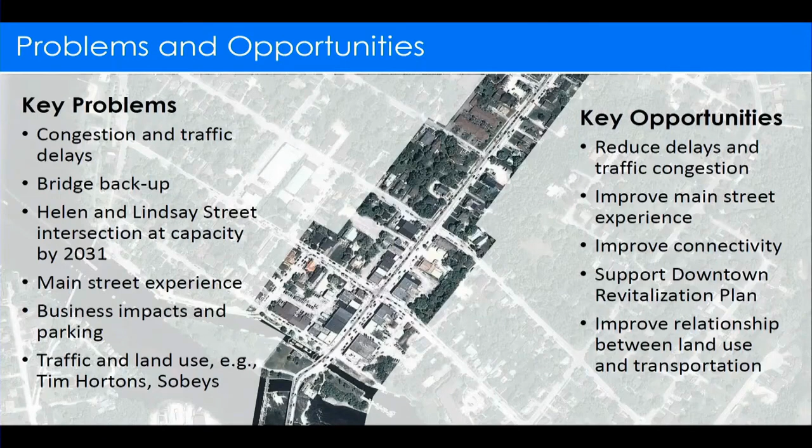You can support downtown revitalization, which is currently going through a revitalization plan that is now being implemented. And ultimately, we can try to address some of the relationship challenges between the land use that's in play right now and the transportation network that exists.

Next slide, please. So the core issues relate to two elements: it's traffic volume, but it's also traffic flow.

So sometimes I think people think that it's just growth and lots of cars and therefore that's why it's congestion, but it's a combination also of the configuration and the design of intersections and streets and that network and how it connects. So together, those things are what we're trying to address in our alternatives.

The third thing that's a component of these challenges is the route alternatives. So as you all know, given the geography and the topography here, there's not many alternatives. You need to cross this bridge in this specific region in order to get around the area.

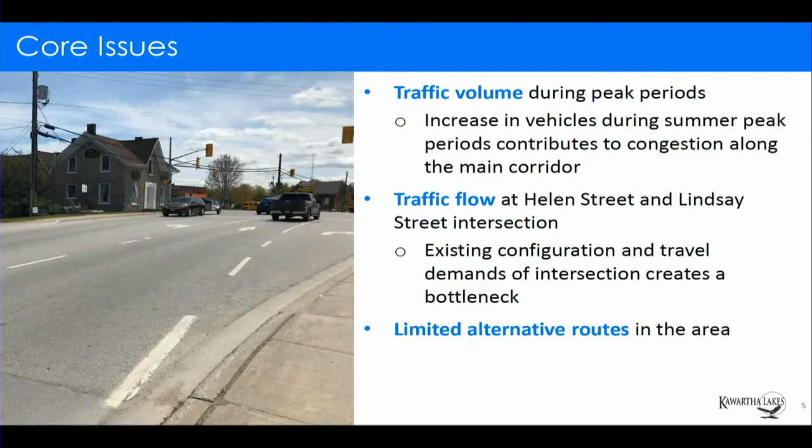North and south of the waterways. And so this becomes one of the key elements that we want to explore in the options for a solution. Next slide, please.

The intersection issues that I was speaking to in terms of the challenges or the problems, this image points these out. This is really at the south end of the bridge. You've got a downtown corridor that's generally at capacity for that intersection of Helen and Lindsay.

And this relates specifically to the southbound traffic in particular that's trying to get through the intersection, while you also have queuing to turn left into the Sobeys and the Tim Hortons site that's on the east side of Lindsay Street.

In addition, there's a number of left turns being made from Helen, trying to turn north onto the bridge. And then from Lindsay Street, the northbound traffic that's actually turning left to head west on Helen Street. So there's a lot of turning movements that are happening here, and the queues get extensive and conflicts arise.

Even whether or not people are following the rules is also a layer on top of that we have to recognize, when people are jumping lights.

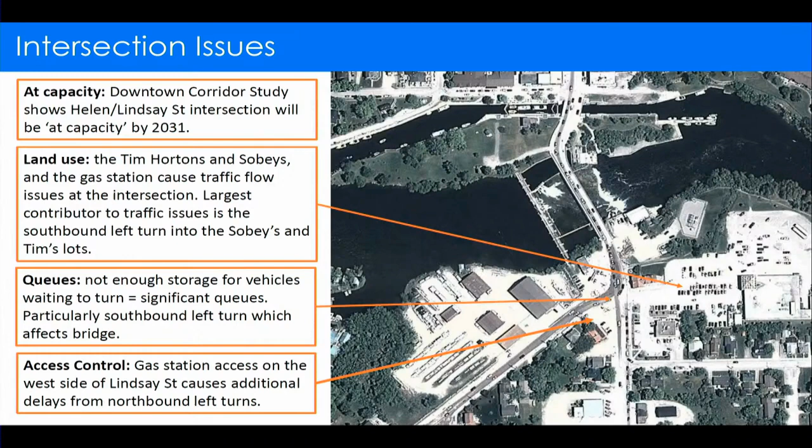And then finally, there is an access control issue. It's quite a bit smaller than some of the other challenges, but that is just because of the single design of a curb on the northwest corner, there's a gas station there, which means that people kind of turn into that site wherever they can and want to, and so it's less controlled, and that low curb causes a few challenges too, although not necessarily as significant.

Next slide, please. So for us to address these issues, we had to undertake a number of studies. This is just a list to give you an idea of the work that we've done: transportation studies, environmental reviews, socioeconomic studies, cultural heritage and archaeology, and technical studies related to road design and bridge design, topography, property, utilities, those kinds of things.

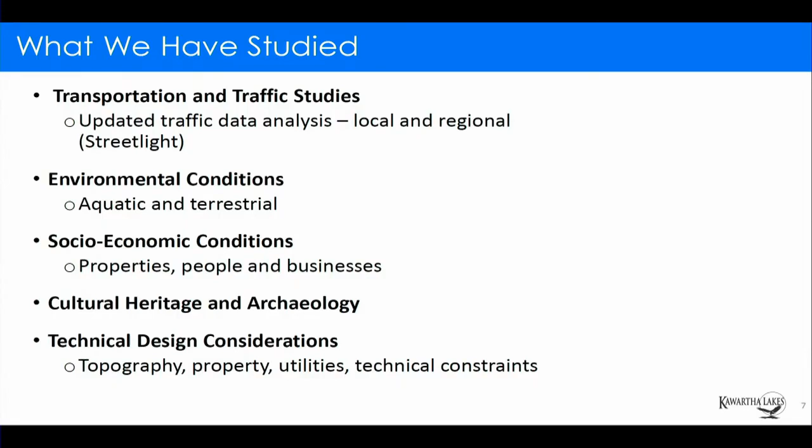Next slide, please. So the options list that we came up with and we took out for public consultation was a do nothing option, which you always include in an EA study. So we have that on that list.

And improve local traffic operations. So this is a smaller scale type of intervention working within the network that exists.

Expanding the existing bridge. So can we look at solutions that actually address the existing bridge that's there and help manage the traffic challenges by doing that?

Building a second in-town crossing. So looking within town, is there another location where a potential second bridge could go? And then the connections that actually are required for a second bridge.

And then a bypass. Is there a bypass around town, and what would the value of that be, and how effective would that be, and where would it be? Next slide, please.

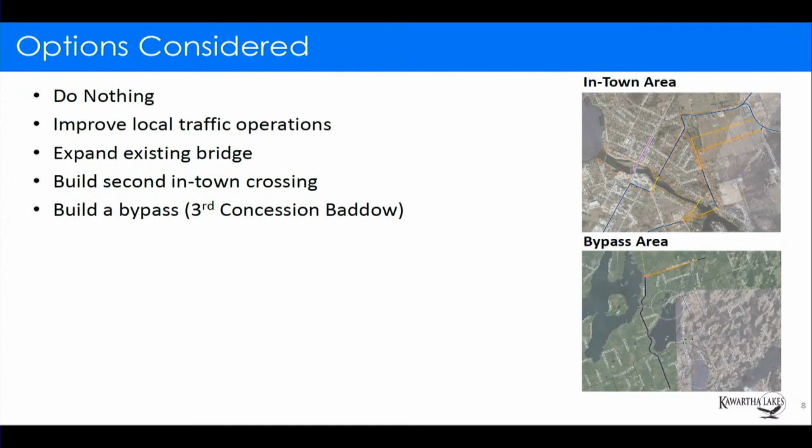I'll start with our traffic study because it's important to set the grounding for the recommendations being made. There's quite a lot of work done around existing traffic issues. We did two things: one, we set up video cameras to look at live traffic in the area at the end of May last year, over a period of 4 days.

We also did an examination based on data collection using streetlight data, which tracks GPS systems on phones and in cars, and looks at the origin and destination of traffic crossing the bridge. It's a great tool to hone in on where that traffic is coming from, where it's going, and to extrapolate key analysis to understand what solutions would serve the traffic actually using the bridge.

What we found is that most vehicle trips using the bridge originate in a relatively local area. This was surprising at first, since there's a perception that people are coming from outside, or it's just 905 drivers or cottagers passing through without staying local. What we found is there's a large proportion of local traffic, which isn't surprising since there aren't many alternatives — people can't go far without hopping in their car in this geography.

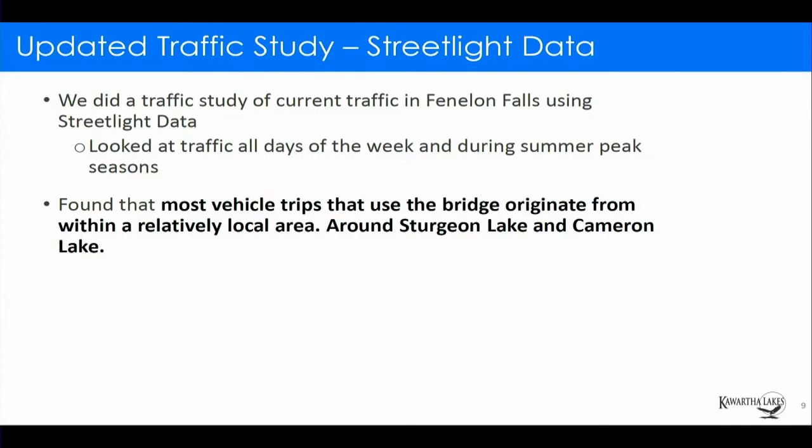Next slide, please. Here's a map of the different zones we looked at within the collected data. The data was gathered for the whole summer, June to September, and we looked at midweek periods, weekend peak periods, commercial vehicles, and autos. This let us really break down and inform the decisions we're recommending today. The purple is the boundary of the city of Kawartha Lakes, and the star is the bridge.

That's the location we're talking about. Ultimately, the majority of trips — over 70% — are coming from within the city of Kawartha Lakes. Up to 20% of trips are between Kawartha Lakes and external areas. That's still a reasonable number, and we want to make sure it's understood — we're not saying there's no external movement to and from, we just want to understand it in context of the other numbers.

Between 35 and 39% of trips travel north to south or south to north — a specific movement using the bridge to cross and travel through this area. Then 47 to 51% of trips are between areas south of the bridge, meaning the zones that abut Sturgeon Lake. Next slide, please.

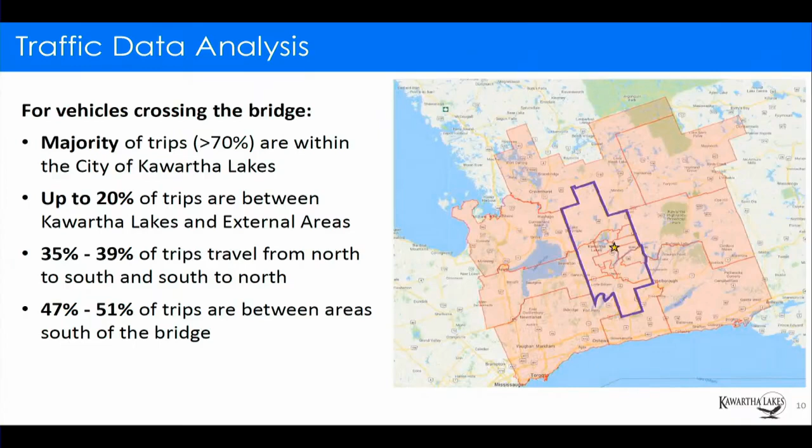I want to point out that if there are questions about the data we collected and our findings, I have additional supplementary materials available to show during discussion. So ultimately, what does this tell us? It tells us that given there's a lot of local traffic, we need to address some of the traffic operation issues in town. If this is locally generated with local destinations, we should be looking at that — we want to make sure that's on the table.

Number two, there's some support for both in-town movement with traffic diversion — approximately 20 to 30% of traffic could be diverted around town. As I noted, 20% of the traffic is traveling north-south through the city of Kawartha Lakes, which means there's actually an opportunity for 20 to 30% of that traffic to be diverted.

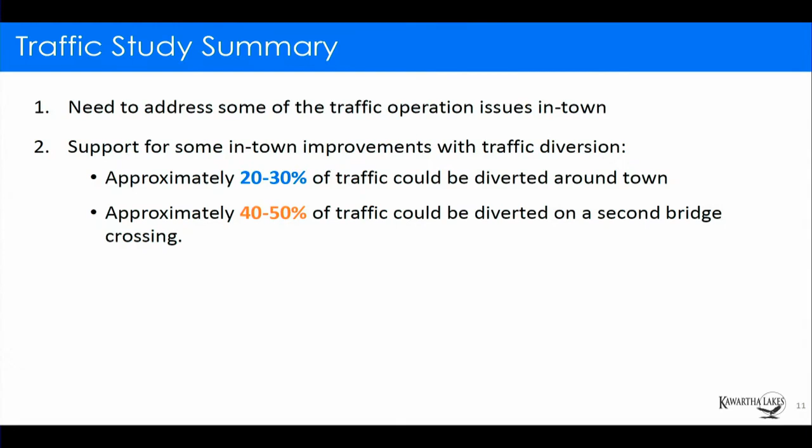If you wanted to do a second bridge, you'd have 40 to 50% of the traffic that could be diverted onto a parallel second bridge in town. So there's our context.

In terms of options, next slide please. The traffic operation improvements - I'm going to start at the small scale, the local side.

At the local level within the existing network, the traffic operation improvements we looked at were very extensive. Ian can speak more to this if there's questions. We looked at more than 25 different options, and they fell into categories of signal changes, access control - the left turning that happens and the right turns into sites, that's the land use relationship. Additional capacity - storage lanes for all the queuing that happens when people are trying to turn and don't make it through the light and the queue extends further back. Restricting movements, and the potential to explore or relocate some land uses. We didn't get too far into that; it's more wanting to acknowledge that land use is inherent with the relationship of transportation, and to consider that.

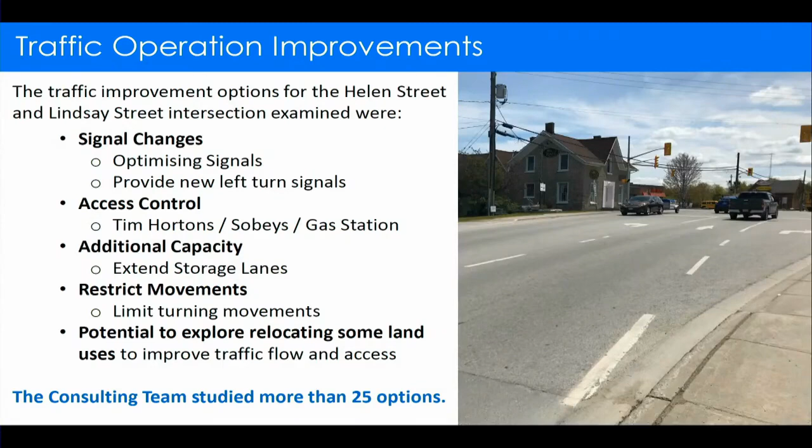Next slide please. Okay, so the next few slides, it's a little challenging to describe because I can't point this out to you using a pointer or anything, so I'm going to try to say this as best I can. The next few slides talk about ultimately the recommended in-town traffic improvement option we have. In our public consultation, we showed a few more than what you're going to see now, but this is the one we landed on for recommendation.

Ultimately, all of the arrows you're seeing on the right-hand side, current condition, are all green - you can do all of these movements. You can drive straight through from Helen Street into the Sobeys and Tim Hortons site. If you're on the bridge and want to turn left into the Sobeys and Tim Hortons site, you can queue in the left turn lane and do that. If you are in the Sobeys and Tim Hortons site and want to exit and go straight through the intersection onto Helen Street, or take a left and head south on Lindsay, you can do all of that. In addition, you can turn right from Lindsay Street into the Tim Hortons and out of it, and you can turn right to exit the Tim Hortons and Sobeys site.

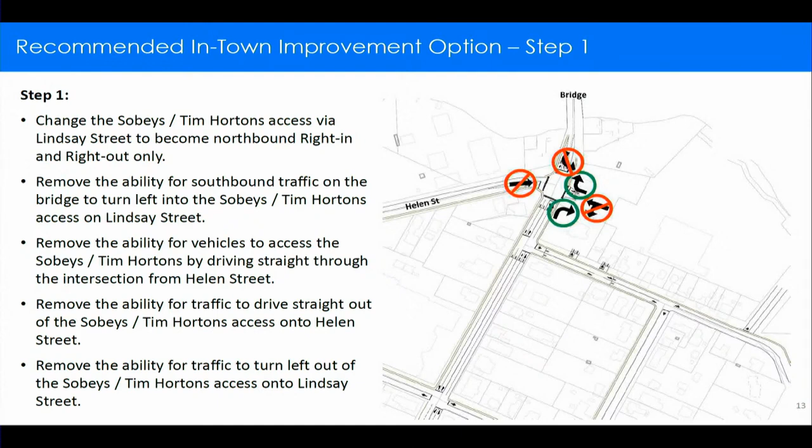What we are suggesting is that of all of those permitted movements today, we start limiting those movements. Ultimately, we start to reduce the amount of traffic that's specifically using this intersection only to both access the Sobeys, the Tim Hortons, the bridge, heading north-south cross through the town, get access to Colborne Street, etc. So the bullets here describe those changes in turning movements. If you go to the next slide, you'll see in the subsequent slides what then results.

First, if we eliminate the left turn from the bridge - so if you're headed southbound and cross over the bridge, and we take off the left turn to be able to turn into Sobeys Tim Hortons - what does that mean? How do you get to the Sobeys and Tim Hortons? You go down to Elliot Street, and there would be a new intersection, a new light added at Elliot Street, and the left turn would be permitted there. You can see in blue the movement from the bridge southbound to go into the Sobeys around the back of the building. There is already an access to the Tim Hortons on Elliot Street, so that's how you would get into the Tim Hortons from there, from that earlier access point that's closer to Lindsay Street.

In addition, for people from Helen Street, instead of being able to drive straight through into the Sobeys and Tim Hortons, they would have to take a right at Lindsay and then a left onto Elliot. Ultimately, this would move the traffic around a bit and relieve that pressure for those turning movements, and allow a little bit more green time for through traffic. So you can get more traffic through town, and that's actually one of the key outcomes of this solution.

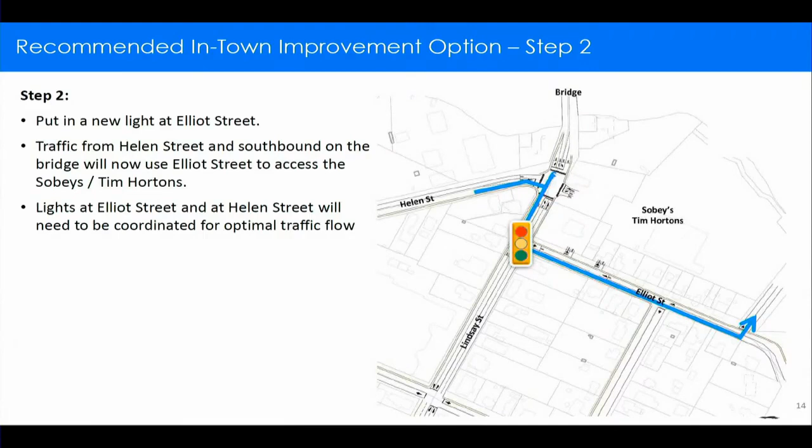Next slide please. Step 3 is to exit.

So what we're recommending is that you can exit the Sobeys and Tim Hortons site. It is a right in, right out. But if you wanted to go south, or if you wanted to go west, you would use Elliot Street.

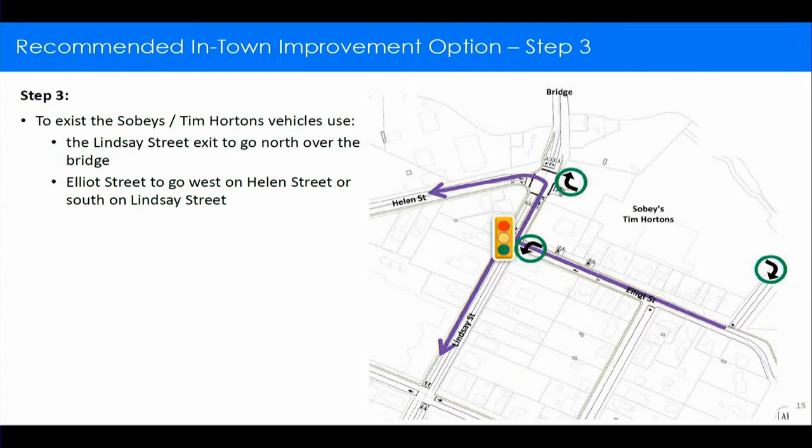So again, if you were at the Tim Hortons, you could use the existing Elliot Street entrance and exit. But for Sobeys, you would go around the back, and that road is currently only a service access to the Sobeys and Tim Hortons. It's right of way. The width of the property is wide enough. It would require repaving, but other than that, it could accommodate the movements we are suggesting.

So combining all of this is what it looks like all together. At the intersection of Helen and Lindsay, there will now be two southbound through lanes, which you don't have currently, and that will get vehicles through the intersection with less green time than you actually require, and allows for more green time to be given to the other movements at that intersection. The southbound left turns are better accommodated at Elliot Street, and there's fewer conflicts. So when we're modeling this with the traffic modeling, we're able to see that the conflict is reduced, and they're able to get more vehicles through.

It is really important that we talk about Elliot Street itself. This has implications for Elliot Street, and we want to acknowledge that and make sure that there's some discussion on that. I will get to that in the next slide.

There's also potential - so this is the solution that we can put forward as part of this work within the public space right of way that's available. Additional improvements could be made by working with the Sobeys and then Tim Hortons. There's potential opportunity to acquire other sites on that property to allow for them to reorganize entrances and exits and circulation on their property. So there's some on-site improvements that could be made. Obviously, we can't make those recommendations for them, but it is something that they're aware of and that could be further explored.

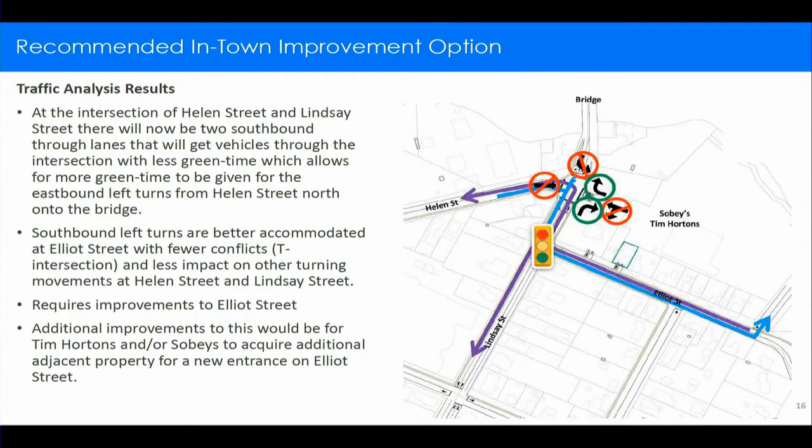So Elliot Street, as I said, getting to the key point of Elliot. There have been a number of questions from the community about this, and I want to be clear that Elliot Street has already been planned for reconstruction. So there are current issues, and people have brought those forward to me as well. The condition of Elliot is not great, but most importantly is the Tim Hortons traffic.

This is outside of necessarily the peak traffic issues that are being faced even within our EA study. This is a case of Tim Hortons, in the sense that it's not just here - this happens all over the place with very popular drive-through destinations. And so to address that, the city has been looking at, through another separate work, upgrades to Elliot Street to deal with the condition of Elliot itself, as well as potentially address some of the Tim Hortons access issues.

Ultimately, what we're recommending is that you actually go a bit further than what's currently in the reconstruction plan for Elliot, and we revisit it because, as you can see here, within the property limits, so without needing to take property from anyone, you can add a left turn lane as a center lane on Elliot Street. What we're showing here is just an example of that. This is just really preliminary. It wasn't part of our work to really draw up Elliot Street in itself, but that should be the next step if this was pushed forward.

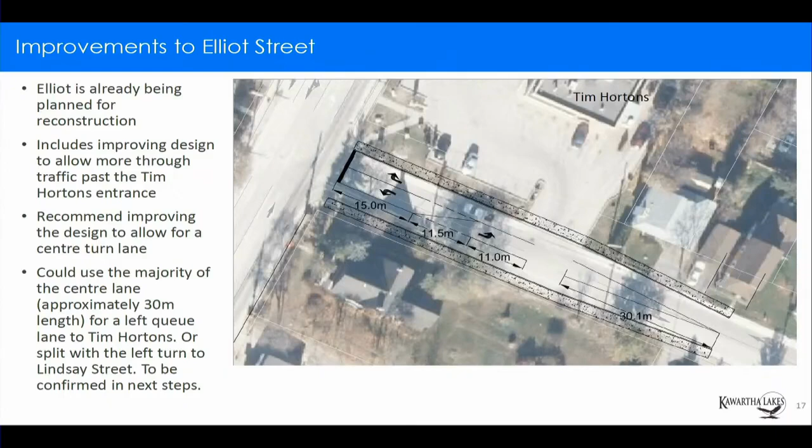This is something we recommend go forward regardless, because of the issues happening here with those movements. So that sums up what I've got for the traffic improvements in town. That's our recommendation, part one, for the work we've done.

In addition to this, the work on traffic improvements doesn't require an EA. It can all be done within the Schedule A, Schedule A+ categories of an environmental assessment. The next items all require larger EAs, and that's what I'm going to go through here, what we've assessed and where we've landed.

One of them, as I said earlier, is bridge widening. I'll get right to it: we don't recommend that bridge widening be considered as a solution to traffic. We acknowledge that bridge rehab is required, and it's something that's on the books for Fenelon Falls, and that's an important thing.

Within that, we also heard quite a lot from the community, and we agree that improving the pedestrian crossing that's part of the bridge is important, and that can happen. One of the key things is to move it to the east side of the bridge instead of its current location, and to make it better. Currently it floods and it's not wide enough for two mobility devices to pass each other, etc. Those kinds of things we do agree with, and they should happen.

But expanding the bridge, either to accommodate a larger queuing lane for southbound traffic to turn left into the Sobeys Tim Hortons, or to expand it so you could have two through lanes that would merge together - what we're seeing in our traffic results is that we're not getting the benefit, because the movements of turning at Helen and Lindsay, even if you increase the queue length or space for vehicles to queue along the bridge, they would continue to queue, and eventually your queue would merge with the through lane. That continuation of queuing is because you just can't get enough vehicles through this intersection, turning left through it with all the other competing demands happening. So ultimately, the bridge expansion for traffic improvement is not what we recommend.

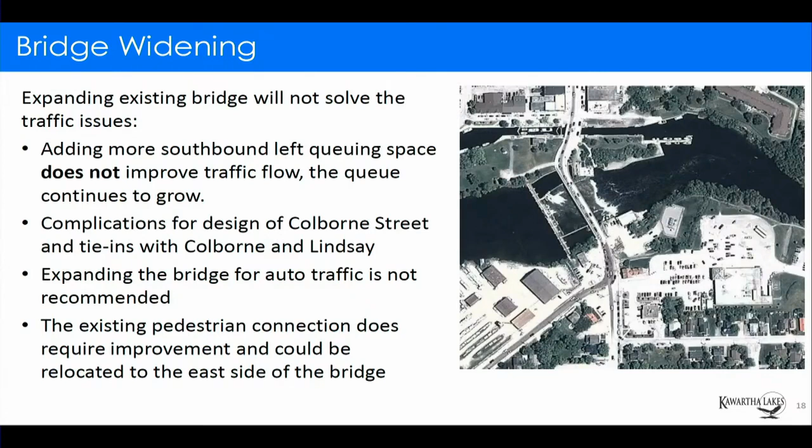The second bridge solution is the in-town bridge crossing. There's been a lot of discussion about this, and I still have a number of conversations on a regular, weekly basis with residents about opportunities for a second in-town crossing. As part of our study and the recommendations here, ultimately, a second in-town crossing has a lot of big wins in terms of traffic.

The scale of the solution, in our professional opinion, does not match the scale of the need at this point. Ultimately, we're looking at 2031 traffic, and we don't see a need to have double the capacity in the local network here for the amount of impacts incurred through a solution of this scale - a second bridge in town. That also includes the cost of a solution of this scale.

So the topography is extremely complicated here. It likely requires a 3 to 4 span bridge. We have roads, on the south side of the waterway, that are existing residential quiet communities with schools and long-term care facilities, that would have to connect over and across to new roads on properties that don't exist - some of which have cultural heritage and natural heritage features we need to be cognizant of. It doesn't mean you can't do it. It just means the challenges are big, the costs will be big, and the impacts to property are big. So at this time, we don't see the scale of the need matching a scale of solution this big.

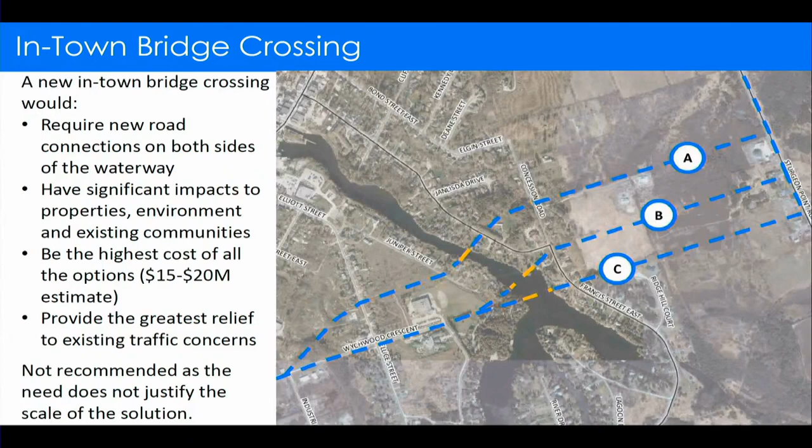It does not mean that wouldn't be possible in the future, and I'll get to recommendations in a couple slides that I want to speak to on that.

So the next one is the bypass. As I said in the traffic study, we found that up to 20% of traffic was going through, which means that is the potential traffic to redirect onto a bypass. In addition, it's also truck traffic.

We see this bypass as also a potential haul route, and that was actually previously identified by the city as a haul route or truck goods movement potential corridor or connection. This bypass would have fewer impacts to property. We'd be using the existing Highway 35 connection up to 3rd Concession, and then across 3rd Concession and a bridge over the Burnt River, continuing on 3rd Concession to connect again with County Road 121.

It may seem like a big detour, but time-wise it's actually quite similar and comparable, because the slowdown that happens through town—even in this graphic you can see the length of these routes is actually quite similar. When you have to slow down going through town, that outweighs the additional distance you might be taking for a bypass.

This will have some property impacts as well. There are cottages here, and it's within a floodplain, so I'll talk about that in terms of the key issues that have to be addressed. Ultimately, we think the combination of traffic improvements in town with the Helen and Lindsay intersection and a bypass is the scale of relief well suited for the current and future traffic conditions projected to 2031, as we've studied them with the information we have.

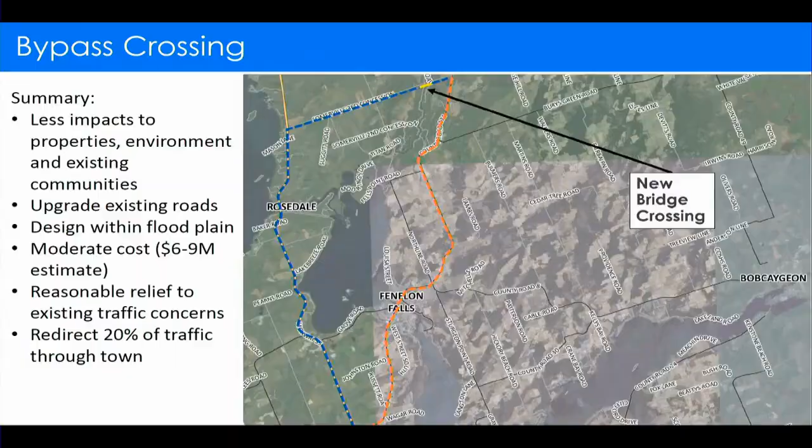So what does that mean in terms of the bypass? Unfortunately, this isn't the end of the study that's required. A bypass over the river does require a Schedule C EA. The work we have done to date has been up to and including a Phase 1 and Phase 2, which is a Schedule B EA, meaning we looked at the big picture solutions—those buckets I've just outlined. Now that we have a preliminary recommendation, if supported by council, Schedule C work would be required, which includes design to address these key issues.

So the key issues are, obviously, property impacts. You can see 8 to 10 properties here that we've highlighted as key properties. Some may not actually have the footprint of the bridge, but we recognize they would be very close to this structure, and you could have noise, spray, and things like that which would need to be addressed. It may be that you take a few more properties to provide a buffer, but that needs to be worked out in detailed design, or in the Schedule C work.

There's the natural environment conditions—this is a river, there's wildlife habitat, natural green spaces, well-established woodlots and trees in this area. Noise and air quality, I already spoke to; that also applies along Third Concession. We have to recognize that we'd be increasing traffic on Third Concession, so we need to look at the condition of the road and whether any repaving may be required, etc.

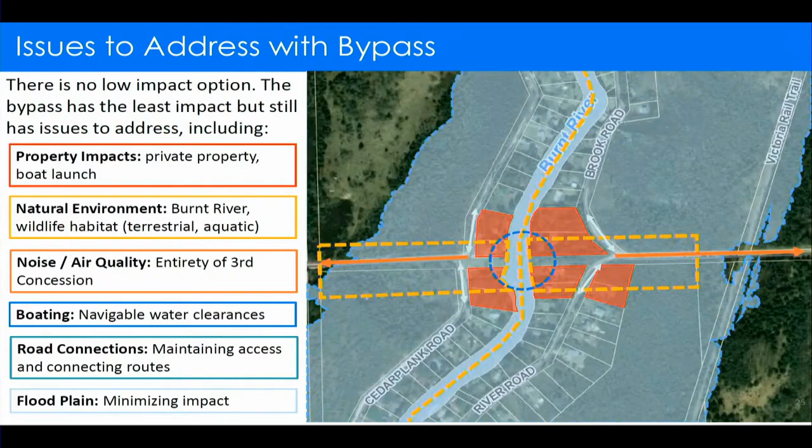So high level cost comparison, just to summarize where we're at: an in-town crossing would be the most expensive option, with the most property acquisition as well as easements. A bypass would be less expensive and would also have fewer construction challenges in terms of clearance and approvals. I should note that with an in-town crossing, the Trent Severn Waterway is a National Historic Site, which requires Parks Canada approval.

We have also had conversations with them as well. There is an ability to streamline the process, but if you wanted to proceed, you'd have to work closely with them to understand what their requirements would be, including clearances and design of the bridge. Often that includes things like not putting footings near the edges of the waterway, and what kind of sediment impacts you may have. So that kind of thing would have to be sorted out for an in-town crossing. The bypass does not have the same kind of federal oversight.

And then traffic improvements, obviously they have the least impact. They're kind of the lower cost range for improvements. Next slide, please.

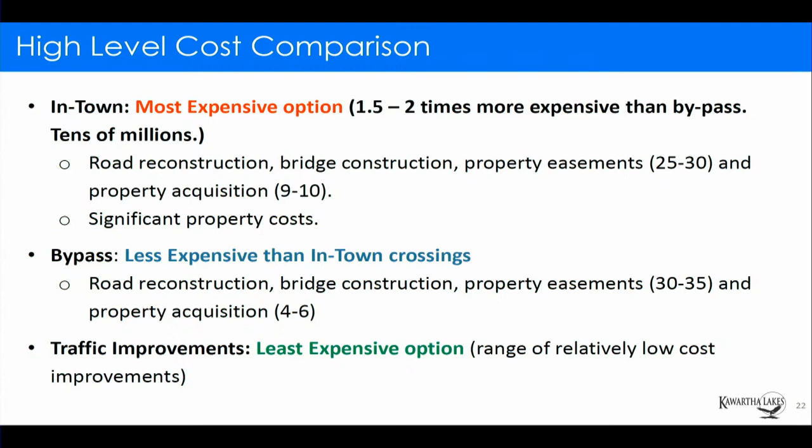Throughout the presentation, I've mentioned a number of things that we've heard from community members. I just want to go through this list, and on the next slide I will talk about some of the key things that have come up from stakeholders that we've tried to address prior to this final presentation. As Corby mentioned, we've had public meetings, 2 public meetings and 2 stakeholder meetings. We've heard a mix of support and concern with solutions. I think what's really important is to recognize there's no silver bullet here, there's no perfect solution, and what we are trying to find through this process is the one that has the least impact with the greatest benefit.

There's concerns with impacts and moving traffic around. One of the key things is to say that you're taking an issue in Fenelon Falls and moving it to the Burnt River. That's something that we've looked at. And ultimately, when you're looking at a geography of traffic flow like this, some of the traffic is generated by people that are broader than Fenelon Falls in and of itself. So I think that's an important understanding to have, that it benefits everyone and it impacts a wide range.

The concerns with changing Helen and Lindsay Street and that intersection, I'll get to that in the next slide, but we have heard about the concerns about the recommendations we've made about putting an intersection at Elliot and restricting movements at the intersection. Many people have talked about concerns with Tim Hortons. I've touched on this with you. The recommendations are within what we can do for what's in the public space and the private space. There probably are some solutions that they could do on site that could be explored.

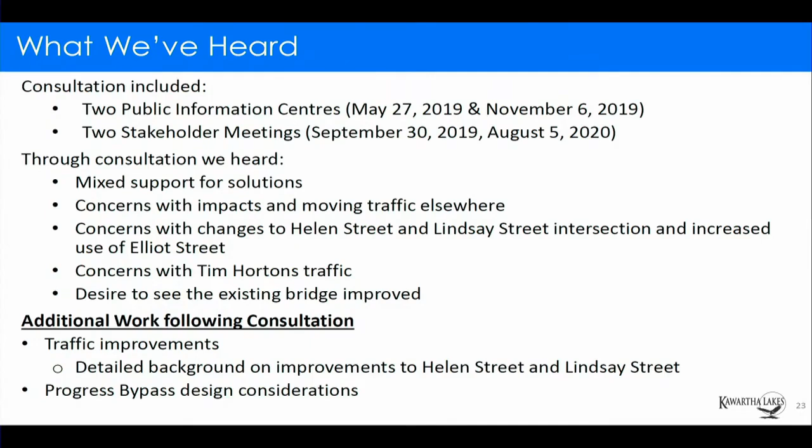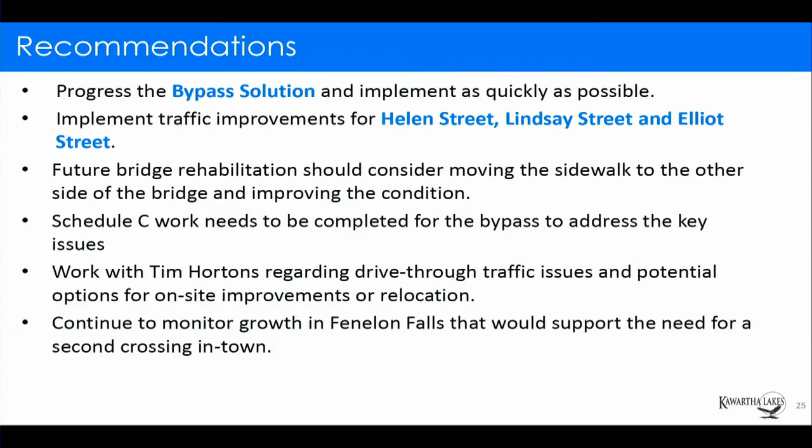So that's the final point—we're happy to open it up for questions.

Thank you for that, appreciate it. Mary Lise, you ran through that like you knew what you were talking about. Thank you, that's much appreciated. So let's get a motion to receive, and we'll see if there are any questions or conversation we want to have at this point. Motion to receive, Councillor Elmsley, seconded by Councillor Vale. Councillor Elmsley had a question—go ahead. Yeah, thanks for the presentation.

You had public meetings in May and November of 2019, and then a stakeholders meeting in August 2020, but there was no follow-up to the public meetings. I'm wondering if it's possible to schedule another public meeting to close the loop with the folks who showed up in 2019 who may be looking for your recommendations. Mr. Mayor, I'm asking that staff arrange with Dillon to have a public meeting in Fenelon to close that loop. So let's make that one of the recommendations when we get to the report, because they're looking for future direction from this council moving forward. I think that's a good direction to give when we get to the report, if that's okay.